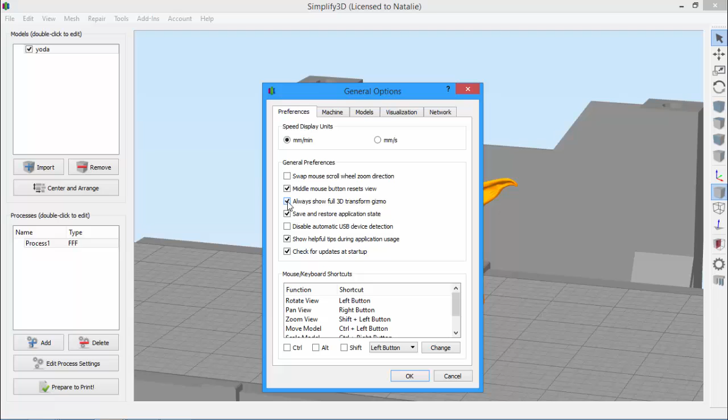For today's example, we're going to add an accessory to our Yoda model. But first, I need to make sure the gizmo is enabled. Go to Tools, then Options. For Mac users, click on the name Simplify3D in the menu bar, then select Preferences. Then you'll check the box next to Always Show Full 3D Transform Gizmo.

So to show you what this looks like, we'll click the icon in the right toolbar to turn on Scaling. You'll see that there are now these three different colored handles that correspond to the three axes. Red is the x-axis, green is the y-axis, and blue is the z-axis. I remember it as RGB XYZ.

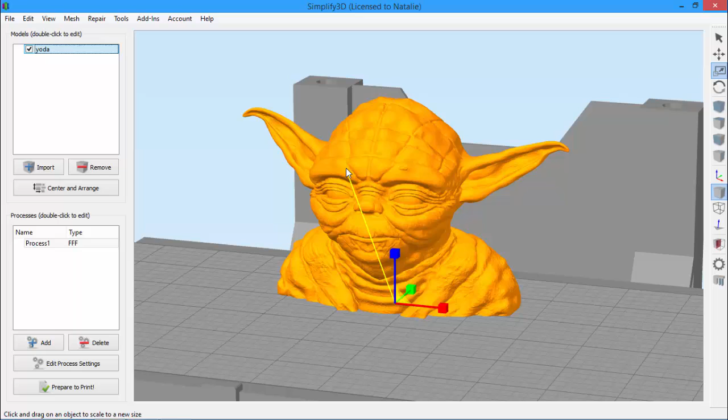Clicking on one of these handles will perform an action only in the corresponding axis. For example, if I want to scale Yoda non-uniformly in just the X direction, I click on the red handle and drag. I could do the same to stretch him in the Z direction. If I want to do uniform scaling, I just grab the model anywhere but those handles, and it scales just like we're used to. The translate and rotate features work the same way.

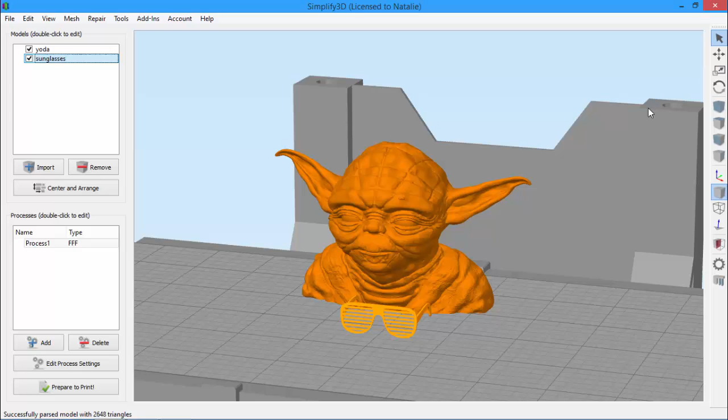So now we're going to use the gizmo feature to give Yoda a sweet pair of shades. First, I'll import my sunglasses model, and now we're going to put these sunglasses on Yoda's face. So first we'll move to a front view and zoom in. It looks like these sunglasses are a little small for Yoda right now, so the first thing we're going to do is scale them. So I'm just going to scale them uniformly by clicking anywhere on the model and dragging. That looks like a good place to start.

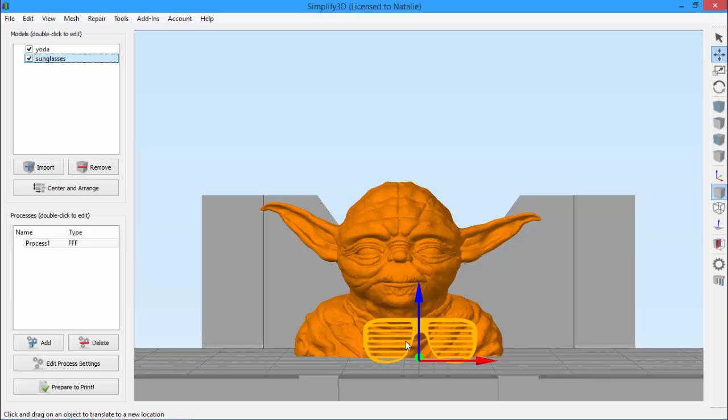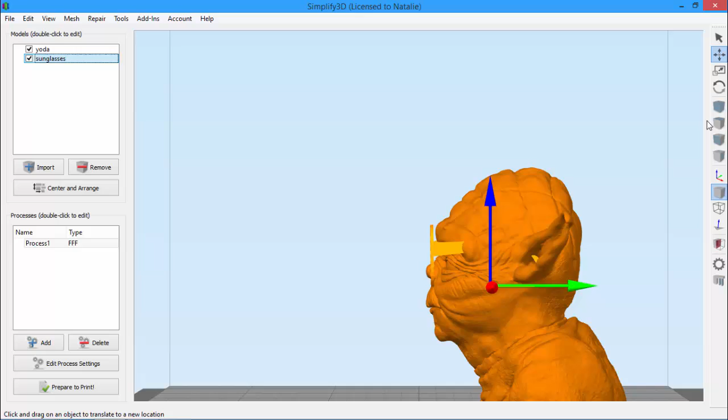Now I'll need to translate them up and over so that they line up with his face. Now let's take a look at the side view. Now let's zoom in, and we can see that we're going to need to move the glasses back a little bit. But now it looks like the earpiece is going inside of his head, and that's not good. So we'll turn on rotation and just tilt them up a little bit.

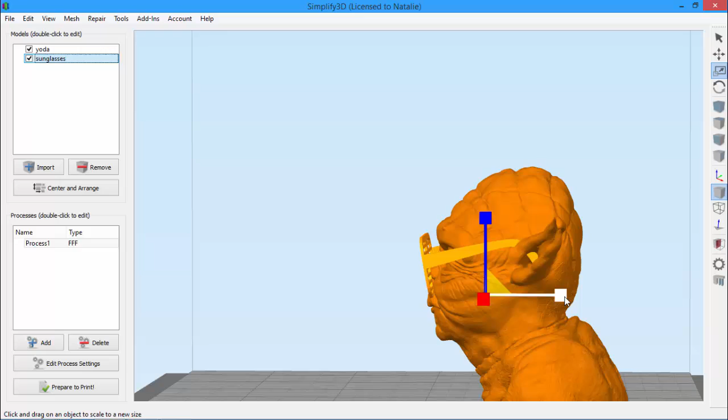We can also help this by non-uniformly scaling the glasses. So we'll stretch them in the X direction so they're a little bit wider for Yoda's head. Now we'll check back on the side. Looks like we also need to scale them a little bit so the earpieces will go back behind his ears. So we just scale non-uniformly across the y-axis.

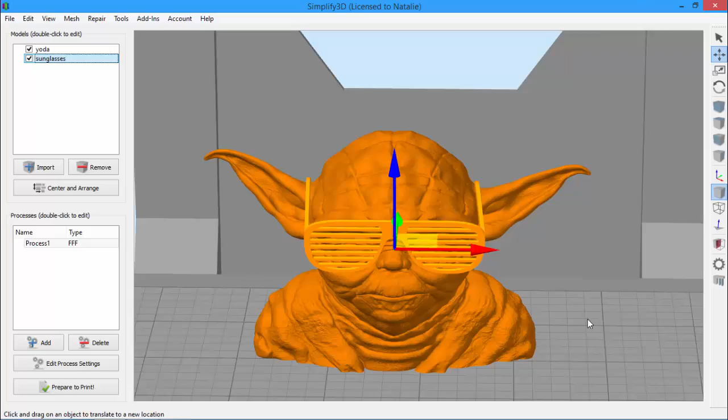That looks better. So now we'll shift them back and see how they fit. Bring them up a little bit. Check how they're fitting on those ears. There we go. Yep, Yoda never looked this cool.

So obviously we used sort of a silly example today, but as I'm sure you can imagine, there are many practical applications for the gizmo. Personally, I tend to leave the gizmo off for most models because it's easy to accidentally grab a handle I didn't mean to, and so I only use it when I have more complicated situations. Thankfully, when I do need it, it's only one checkbox away.